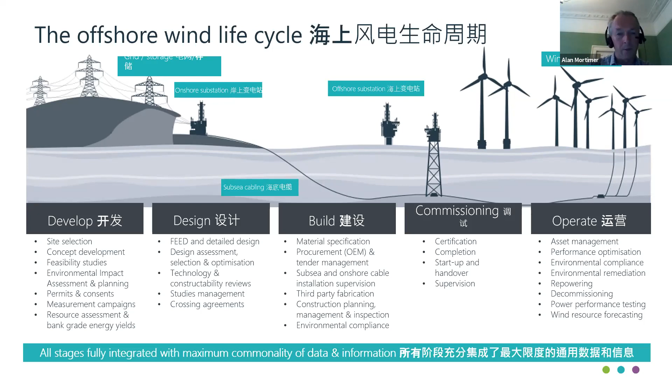Measuring the wind is a key area for offshore wind, just as it is for onshore wind, because production is so sensitive to wind speeds. And so because of that, a lot of effort goes into measurements, with both masts and LiDAR used to gather that data.

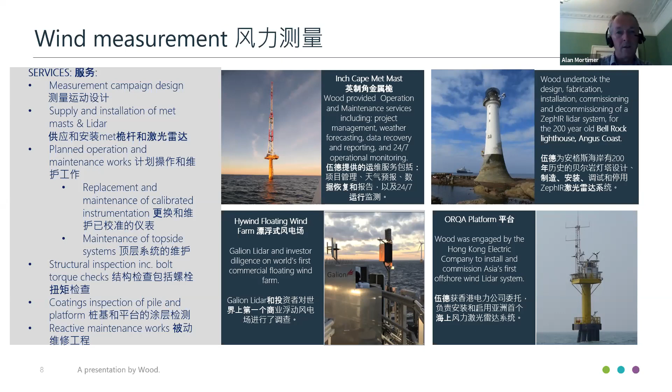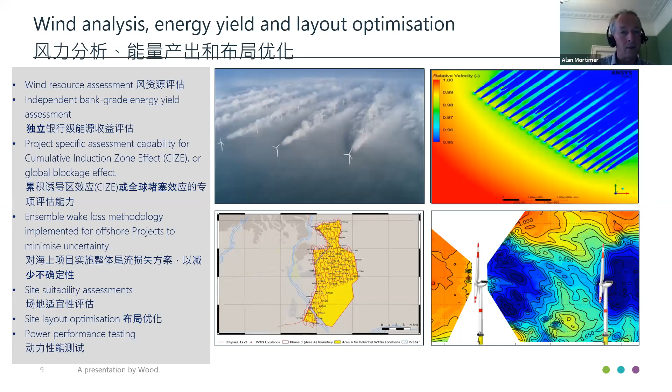And if you look at the bottom right there, that shows some of our LiDAR measurements. This is not a model, this is a measurement, and it's showing the wind flow behind a turbine and then impinging on the turbine downstream. We've done a lot of work on how to do that as accurately as possible so that we can be confident in our energy yield predictions.

LiDAR is an important technology for us because it gathers a lot of information across a wide area, which is particularly important for offshore wind. So we use scanning LiDAR here, which with a range of 4 kilometers basically gives you a hemisphere of data on wind flow characteristics up to a radius of 4 kilometers.

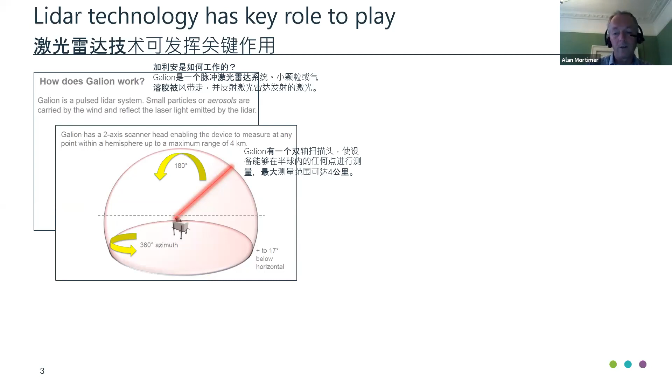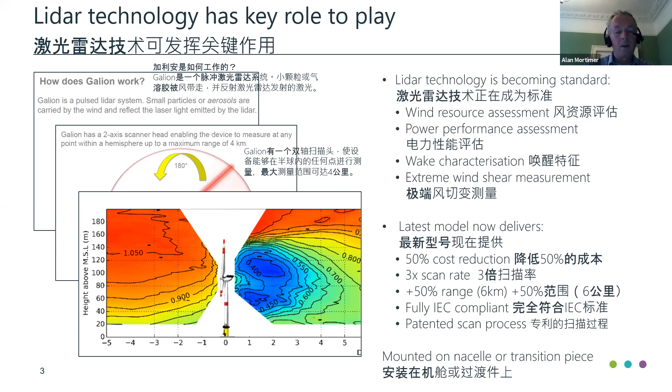Again, you're showing some of the scans which are used to validate our models. LiDAR technology is becoming standard now in offshore wind because of that - not just for wind resource assessment, but also for power performance assessment, so confirming that the productivity of the turbine is what it should be for any given wind speed. Also wake characterization, and extreme shear measurements.

Shear is the difference in wind speed between the top and bottom of the rotor. And it's not as simple as you might think offshore. We're finding conditions when it can be extreme, and that needs to be factored into the design of the plant.

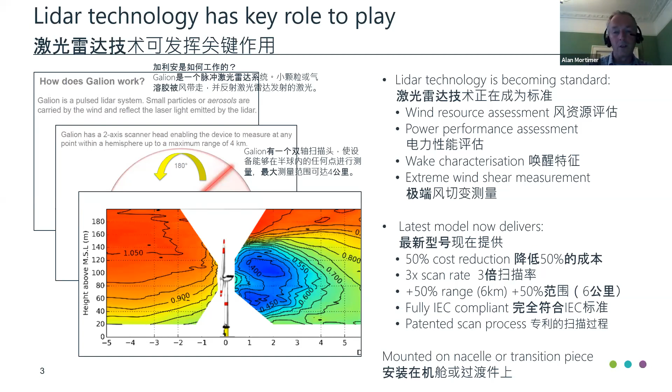So the latest LiDAR technology is coming through now, and it's cheaper. It's 6 kilometres, meeting all the international standards. So it's readily deployable on either the transition piece at the bottom of the tower or on the nacelle at the top of the turbine in order to give that sort of information. LiDAR, we think, has got an important part to play for offshore wind.

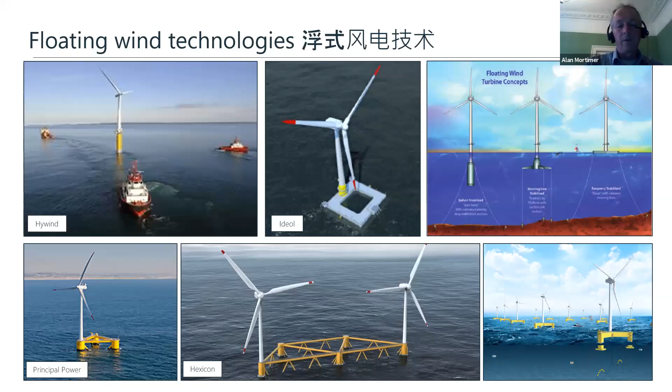I know you've had a separate discussion on floating, so I've just got a summary here on floating from our perspective. Clearly a wide range of floating technologies under development at the moment, and there are key challenges still to be overcome, key one being cost reduction to get to parity with fixed wind, and some parties now believe that will be achieved by around 2030 because costs are coming down.

Scale up to larger turbines - with the bigger turbines, the cost differential reduces between floating wind and fixed wind. Platform and moorings development, with the platform being by far the biggest area of potential for cost reduction. A lot of work is getting underway now on that, but it's still to deliver results in terms of getting platforms down to the costs that they need to be, and installation and repair logistics obviously as well.

But a couple of points for floating: the next generation projects are still going to require some funding support to get going, and secondly, localization of the supply chain is key to political support. So we need to see, for example, the floaters being made at local facilities, whilst also getting the benefits of volume manufacture.

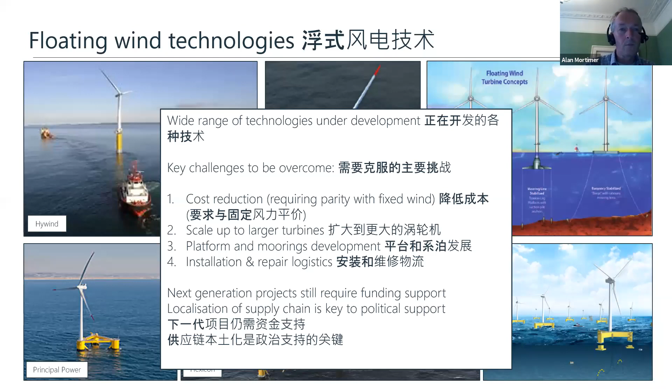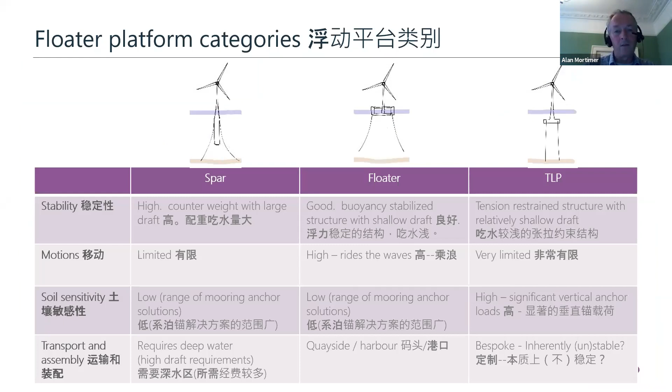Floater platform categories can be split into 3 basic ones really: the spar platform, which is really a huge counterweight to stabilize motions; the floater platforms, the traditional floating platform, if you like, which rides the waves; and then tension leg platform, where you've got very strong positive buoyancy acting against anchors, and the moorings are under tension to help stabilize the platform. It's not clear yet which, if any, of these are going to dominate the market in the longer term, so all of them are being investigated.

A couple of examples of floating developments we've been involved in: the Hywind Scotland, the first commercial floating wind project in the world, and Scotland's showing a lot of potential for floating wind through the current leasing round as well. We see floating wind taking an increasing share of offshore wind generally, and potentially even matching fixed wind in the longer term.

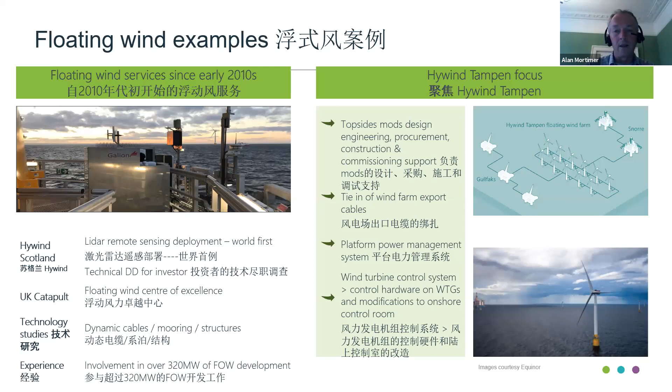But also in relation to oil and gas, we're working on the Hywind Tampen project. This is on electrification of oil and gas platforms, tying them into floating wind turbines, with that power being used to decarbonise the operations of the platforms. That's really a great flagship project, and we see more applications of this type to help decarbonise oil and gas offshore operations.

Innovation is really important in offshore wind, because it's continuing to push the technical boundaries. We work a lot with the Offshore Renewable Energy Catapult, which is a UK government-funded organisation, all about innovation to drive down the costs of offshore wind. So we operate the 7 megawatt turbine there with the Catapult for research purposes.

We're involved in integrity management development work, and some of that is bringing in relevant experience from oil and gas, where we have platforms that have been operating offshore for 40 years or more, so that's valuable knowledge. Digital twinning to reduce costs of operations, LiDAR technology test and development, load measurement, drone surveys as well, and operational optimization. We see all these areas adding up to considerable potential for further reduction of costs of offshore wind.

Just briefly, some project profiles. Here's one we're involved in in the UK, an extension of an existing offshore wind farm. The extension itself is up to 1.2 gigawatts, so very large, and there we're working on the consents and regulatory issues.

Hornsea 1, which is another one at 1.2 gigawatts, a produced operating wind farm, and there we've advised an investor in the project. Vineyard in the USA, which is one of the preeminent projects off the East Coast there, where we've been working with the developer. So just a snapshot, really.

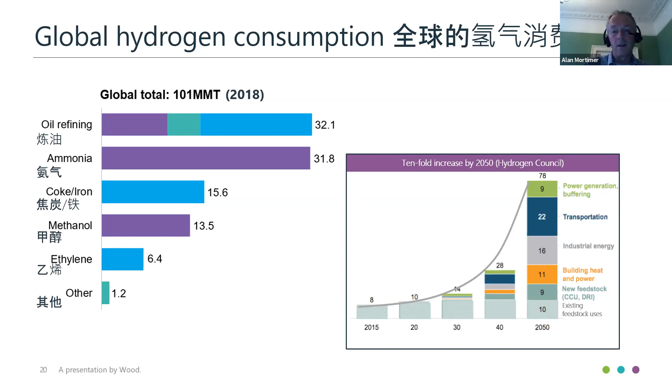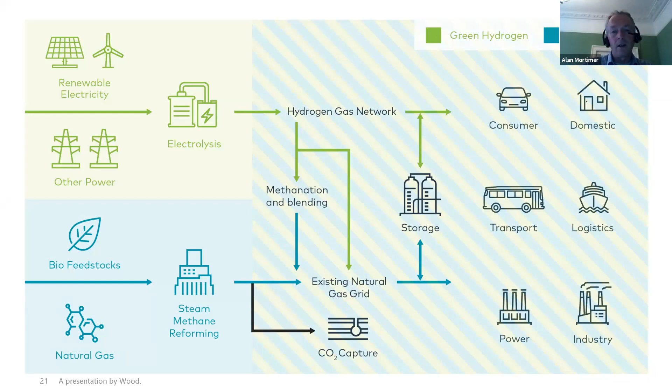This is our own basic depiction of the likely future hydrogen economy and our system. We've got production on the left-hand side there, either green hydrogen, produced through renewable electricity and electrolysis, or blue hydrogen, produced through steam methane reforming of natural gas, or indeed biofeedstocks as well. That then being transported and distributed, and at times stored, for multiple uses in transport, heat, power and industry. It's a bit like power - it's the agglomeration of all of these uses together through a network which gets to scale and then gets costs down. That's what's required for hydrogen.

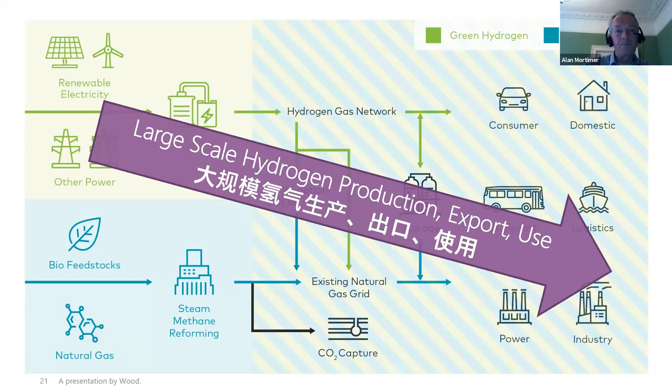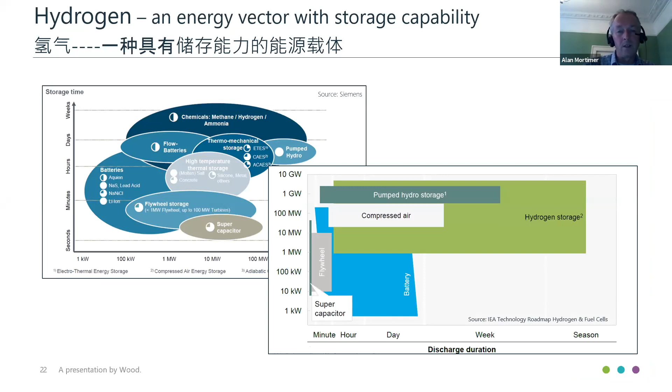We do now believe that that is going to happen. In fact, some parties believe that we will see a quarter of global decarbonisation being achieved through the use of hydrogen, as opposed to pure electrification. Hydrogen, although it's an energy vector, does also come with storage capability, and because of its high energy content, even potentially up to seasonal timeframes of where hydrogen is stored underground. All of that is currently being worked on, and we see again costs coming down and the storage applications of hydrogen becoming important.

When we look at green hydrogen produced through electrolysis, one important factor is that costs are coming down rapidly. We're at the start of the cost reduction curve, and we do see that by 2030 we could have costs that are competitive with conventional sources of hydrogen.

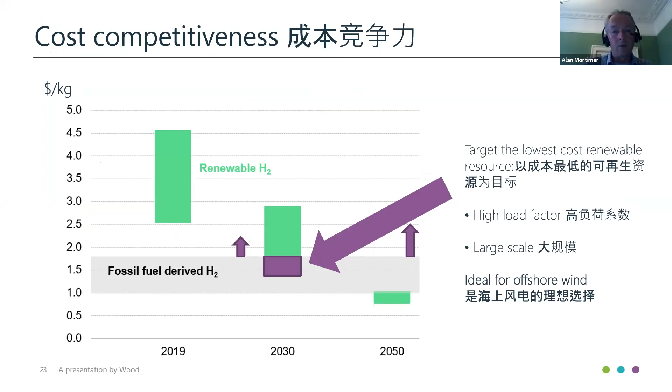So it's a dynamic situation, and we need to factor that into any projects we're involved in. When considering coupling hydrogen production with offshore wind, there are some challenges, and there's a lot of discussion around where that hydrogen production should be done.

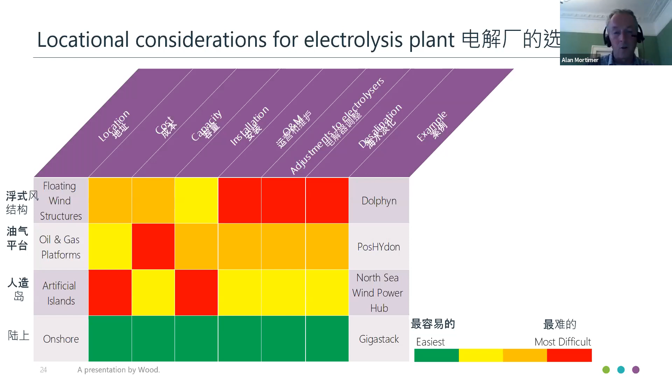At the moment, I think it's fair to say the safest bet, and some of the earliest projects we're looking at, will produce the hydrogen onshore, with the power coming ashore from cables. So offshore wind powering onshore hydrogen generation, with that hydrogen then used locally either in the gas network or for industry. That's what we're seeing at the moment.

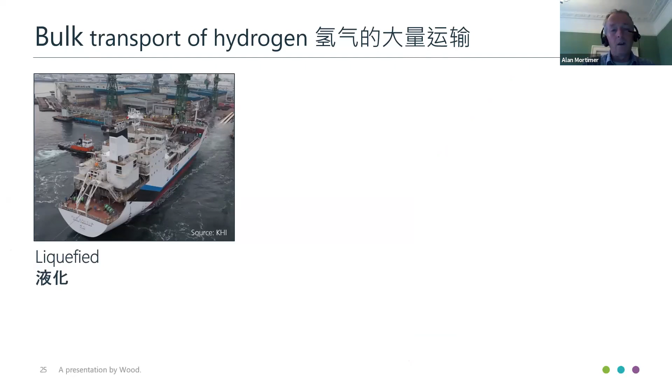The bulk transport of hydrogen is also going to be really critical to its ultimate success, and like with liquid natural gas, it's got to be easily transportable. So we are now seeing liquefied hydrogen tankers starting to emerge, like in that picture. We're also seeing large-scale hydrogen networks being proposed, such as this one for Europe - pipelines.

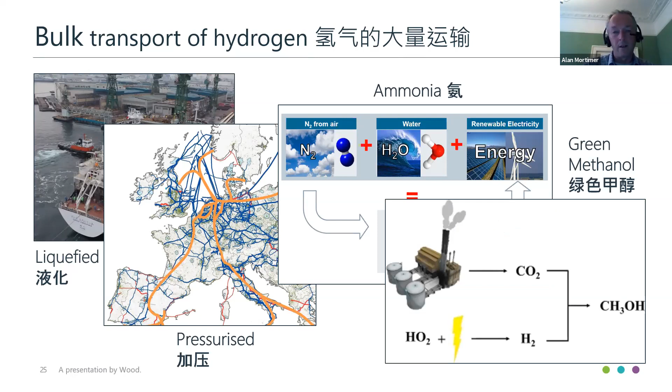We're also seeing hydrogen in the form of ammonia being touted as a means of transporting the energy around, and also as green methanol. We're likely to see different solutions for different applications, but the important point is that it needs to be readily transportable around the world to get an effective market going.